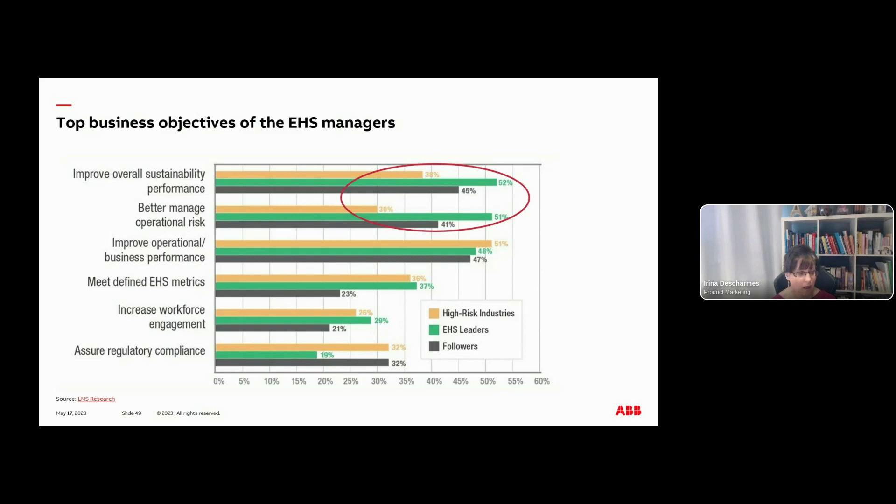Today, we continue covering these top priority areas, but this time there will be new use cases focusing more specifically on the industrial water treatment optimization.

Another area you see at the bottom is the regulatory compliance. And of course, it's no surprise that this is very important for high-risk industries who rated it higher than others. We will cover this area as well with a new case study explaining the benefits of predictive emission monitoring.

Another area is about increased workforce engagement. This is something we are really passionate about. This is what will drive actions so that you meet or exceed your defined metrics. So we will share a story about what's possible with ABB's connected workforce software.

And finally, we will talk about aligning sustainability goals with the overall business strategy and their industrial transformation initiatives. We will share examples of companies moving towards integrated digital operations.

And now, let's look into the topic of water, this critical component of any industrial operations. So over to you, Anis.

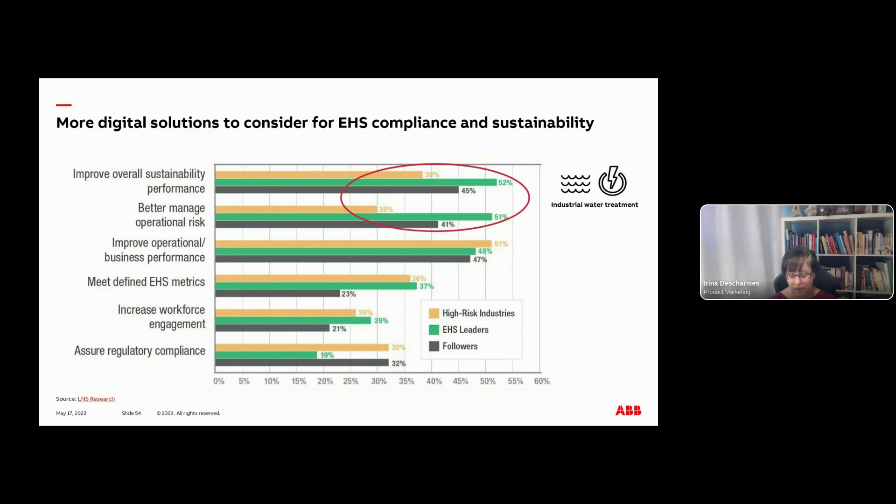Thank you, Irina. Indeed, the water topic is quite important. A few facts to share. According to the United Nations, water use has been increasing at more than double the rate of population growth. Another element to know is that industry is responsible for 12% of the global water withdrawals. And finally, some research shows that we will be unable to meet half of global water demand in the next decades unless investors, companies, and governments urgently improve water stewardship.

So today, there are several digital technologies addressing these challenges, starting from instrumentation allowing monitoring, but then going to advanced process control, analytics, and digital modeling. In addition, some companies are experimenting with the net zero water concept. Today, we would like to share with you a few examples related to industrial water optimization that are already possible with existing technologies.

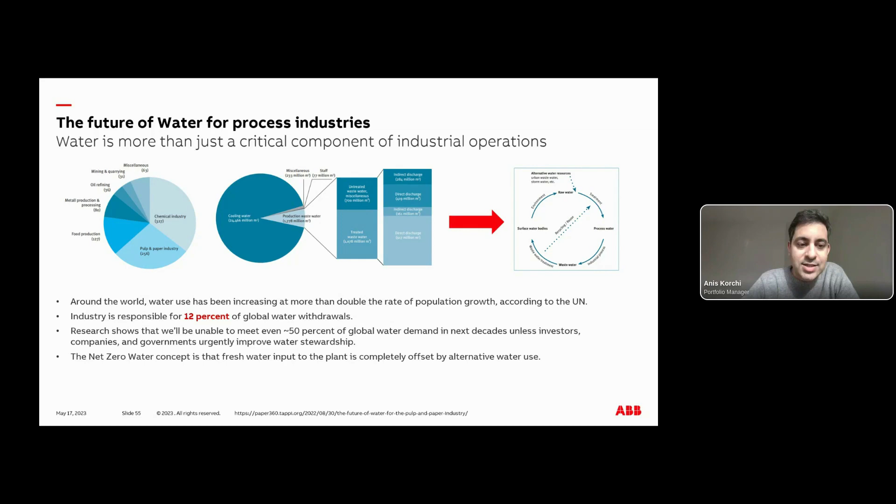Let's look at the first case. Here, we have the mining industry in front of us, where water is an integral part of the operations, but it often gets in the way. Removing it can be difficult. Any downtime in the dewatering system quickly leads to water accumulation within the mine and also possible work stoppages.

As the water volume and pressure fluctuates, the dewatering must be adjusted constantly to deliver continuous service. In many mines, the adjustment happens with manual on and off switching of the pumps without taking into account the equipment health, equipment efficiency, water levels, and electricity prices at every moment in time.

So we have a customer in South America, and ABB is proposing a solution that enables more energy efficiency, cost effectiveness, and a lower carbon footprint. The solution combines several building blocks, including data analytics to understand the pump's behavior, a layer related to advanced process control, and finally a predictive maintenance module. As said, the solution will save energy, reduce downtime, and also prolong the life of the dewatering pumps.

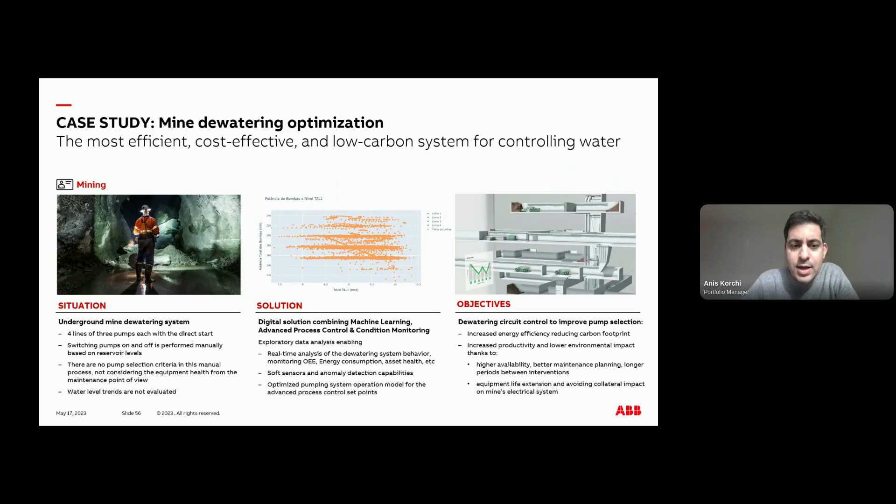Let's look at another example now, and we will move to another industry, and that's the pulp and paper industry. The water is a key resource also in here. It needs to be cleaned, used efficiently, and then returned to nature under exact specifications.

ABB has a couple of digital solutions that were successfully used in the municipal water plants. These learnings can be also applied to the industrial water treatment optimization, since they are quite similar. There are several use cases where we can use such digital optimization tools.

The first one is about the variability of influent flows and water composition. It varies depending on the paper grade that is produced, but also with the weather. For example, heavy rains may impact the water we are pulling from the natural reservoirs. So the variability of the water composition has thus an influence on the treatment process and its related energy costs and also the chemical dosing.

The software purpose is then to manage dynamically all of those disturbances. A key example of a disturbance to manage is about the aeration blowers, in order to use them more efficiently and reduce the energy costs. We would try to balance them optimally to reach the right KPIs, for example, the dissolved oxygen. Typically, the energy reduction enabled will be around 10 to 20%.

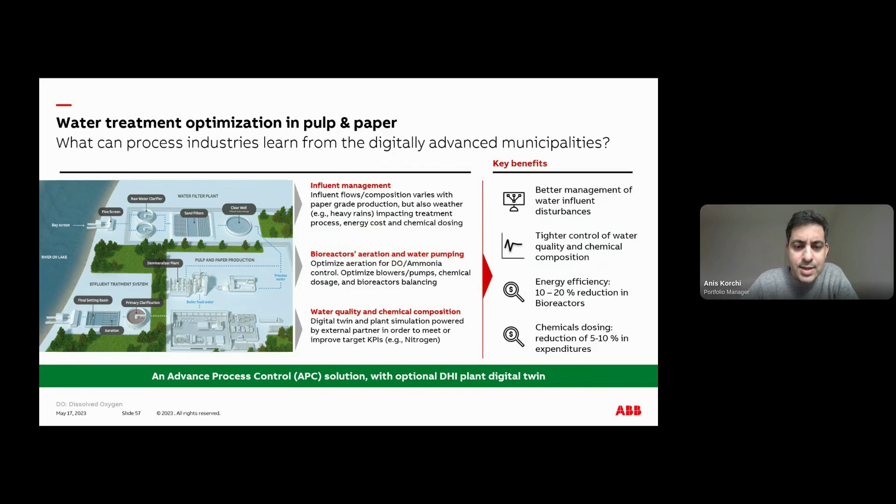So that's it on the topic of water management for today. We would like now to move to another important sustainability area, which is related to regulatory compliance and emissions. I hand it over now to my colleague, Nazanin. Thanks.

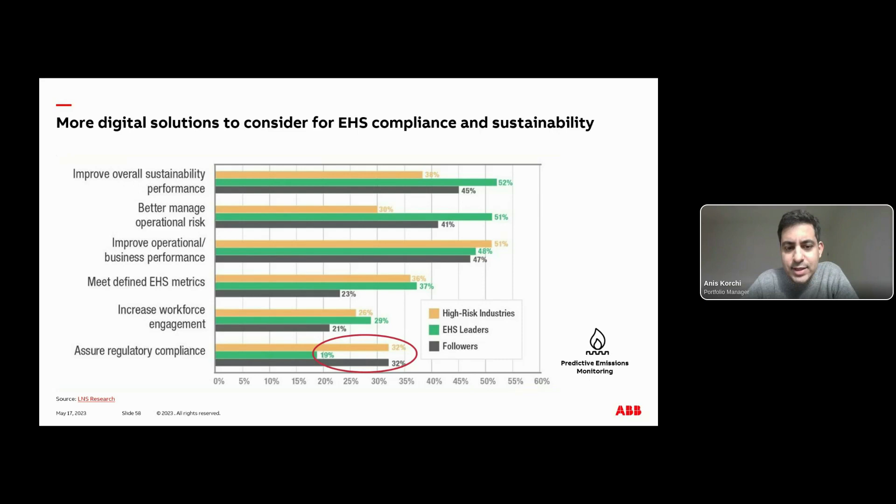Thank you, Anis. Let us have a closer look at environmental regulations, which are increasing. The demand is at least 97.5% availability of continuous emission monitoring solutions. And this increased compliance cost requires 24/7 monitoring of pollutant gases in energy-intensive industries.

Non-compliance has never been more expensive in terms of both fines and threats of shutdown, and due to this complexity of industrial operations, it is often difficult to find faults in the monitoring system.

So most of you are already familiar with continuous emission monitoring system, or so-called CEMS, which is often used for more precise measurement and regulatory compliance. But implementing, operating, and maintaining CEMS hardware is quite costly and requires proper training.

The software-based predictive emission monitoring system, so-called PEMS, was developed as an alternative to overcome these drawbacks. It relies on using operating parameters of the combustion facilities with machine learning methods to build a model that can predict emissions. The capital costs for PEMS are about 50% lower, and its operation and maintenance represent only 10 to 20% of CEMS cost.

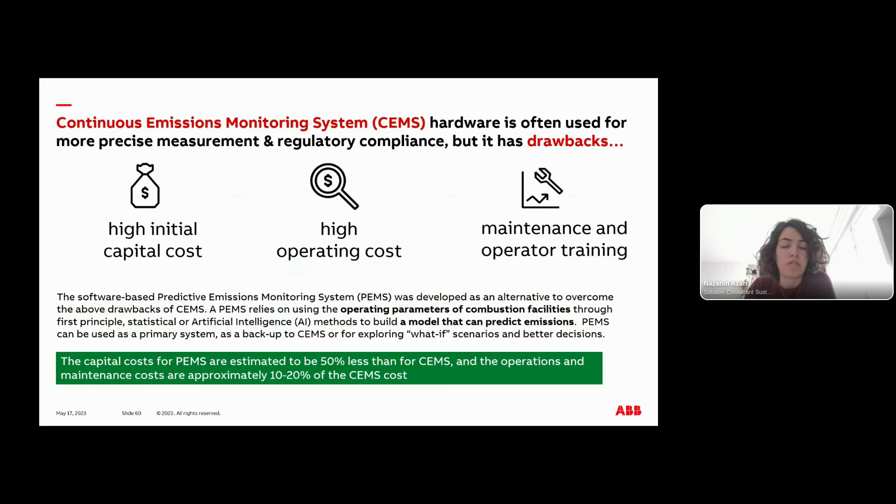Hence it can be used as a primary system, or as a backup for CEMS, for exploring what-if scenarios and better decision making.

ABB is currently working with a natural gas provider in the Middle East to provide maximum reliability and consistency to the compliant emission monitoring reporting. As you see here, process industry can learn from this predictive emission monitoring example.

This non-invasive digital technology exploits the correlation between process variables and emissions. The cost of the compliant emission reporting infrastructure is significantly reduced for this customer, and data availability is close to 100% as required by the certification.

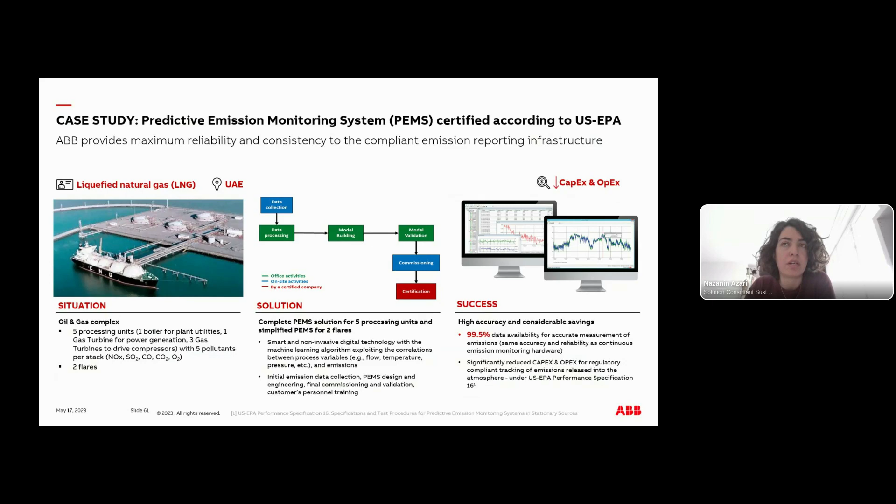This is an affordable, accurate, and compliant digital solution for emission monitoring. It can be applied also in pulp and paper, metal, cement, and other industrial plants with gas turbines, boilers, furnaces, internal combustion engines, or other complex process units. The key requirement here is constant quality combustion fuel as well as proper instrumentation and automation.

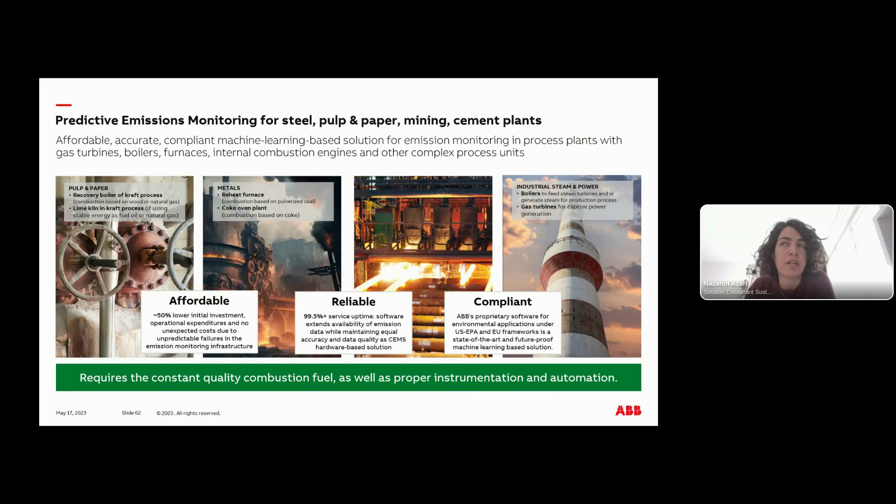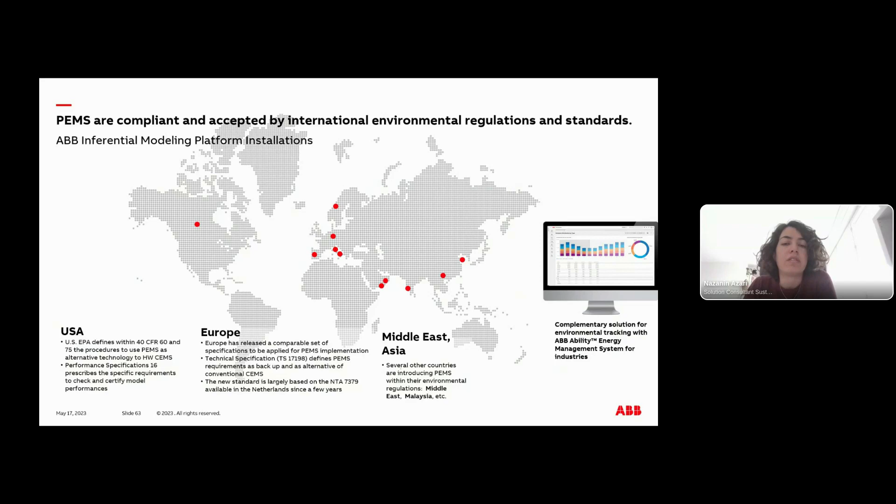According to a study by the Manufacturing Institute, 78% of companies indicated that they were concerned about the aging workforce, specifically the loss of knowledge that accompanies retirements. The high volume of workplace departures has led to a huge gap in expertise and skills at many companies. This hinders their ability to ensure safe execution of their processes or to fully embrace sustainability initiatives. So what can be done for higher workforce engagement in environmental health and safety initiatives?

In this example, ABB helped a Japanese utility address labor issues, safety, and regulatory compliance risks by empowering frontline workers with modern tools. Instead of waiting for experts to arrive on site for troubleshooting, they can call experts within or outside their organization and solve issues over audio, video, and more immersive holographic experience.

They have also converted their paper-based runbooks into interactive apps, letting site engineers get step-by-step guidance from their tablets. The app automatically acquires process values from the DCS to determine whether a procedure has been performed as planned. Teams are empowered to digitize and continuously improve any procedure, health and safety observation, environmental compliance, energy audits, and so on.

With timestamps, execution history tracking, and reporting, this kind of toolset was missing before. It covers many routine and complex activities not covered by other systems like DCS, MES, or CMMS. And of course, less traveling has a direct impact on emission reduction and contributes to achieving companies' sustainability commitments, such as Scope 3.

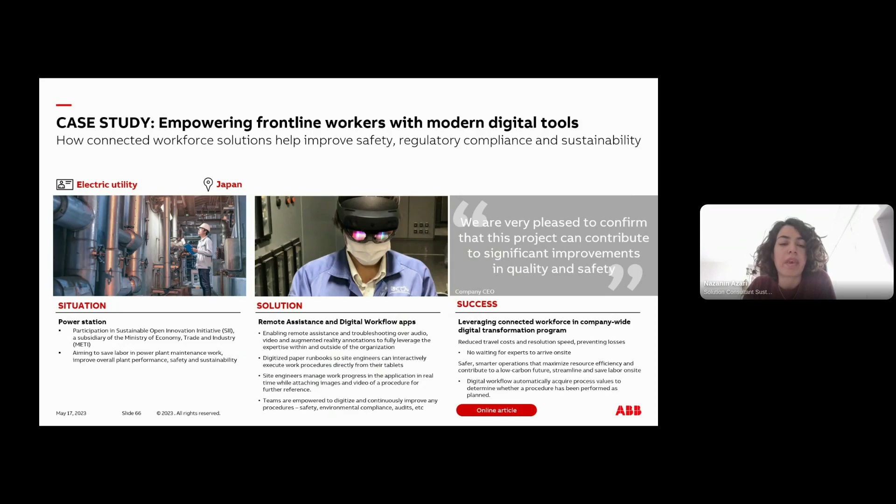Our next studies will demonstrate how digital champions go beyond operational and business performance objectives. They are embedding sustainability into every aspect and moving toward integrated digital operations. Irina can tell you about such even more ambitious programs. Thank you.

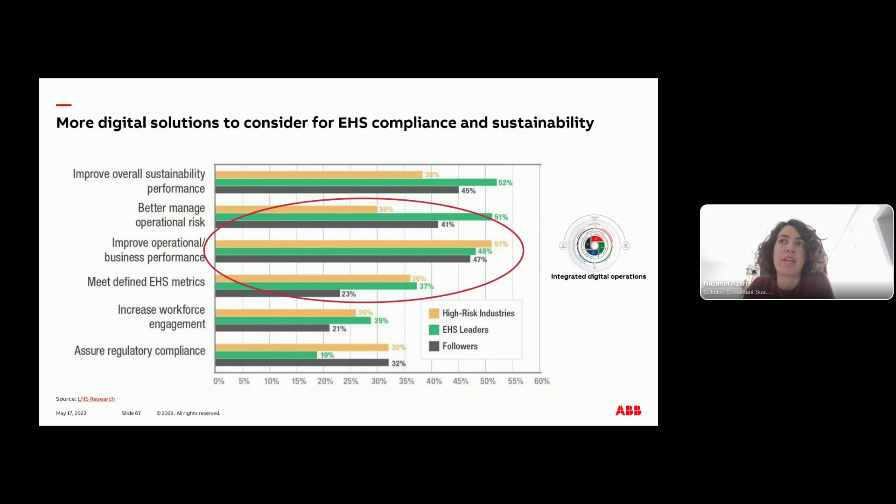Sustainability programs start with digitizing energy management. But as we have seen in some of the previous case studies, when the data collection required for energy monitoring is already in place, this facilitates the connection to other digital systems, for example, manufacturing execution systems for better coordination. And the value of an overall operation strategy will be further extended.

When EMS and MES are also interacting with systems such as asset performance management (APM), advanced process control (APC), or connected workforce, as Nazanin explained to us earlier, these connections provide more automated ways to achieve those more ambitious targets set by digital champions. This also opens opportunities to leverage more analytics with other ecosystem partners, and this is a trend we see, which we will again illustrate with some real life examples from customers we are working with.

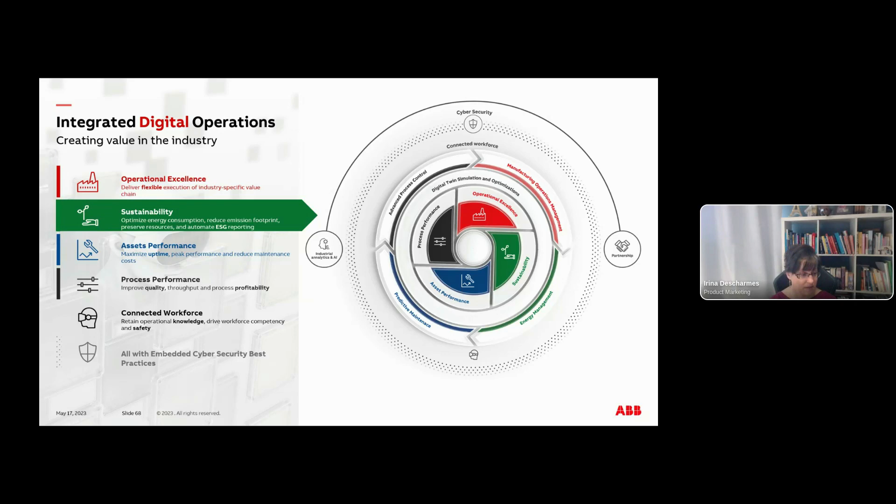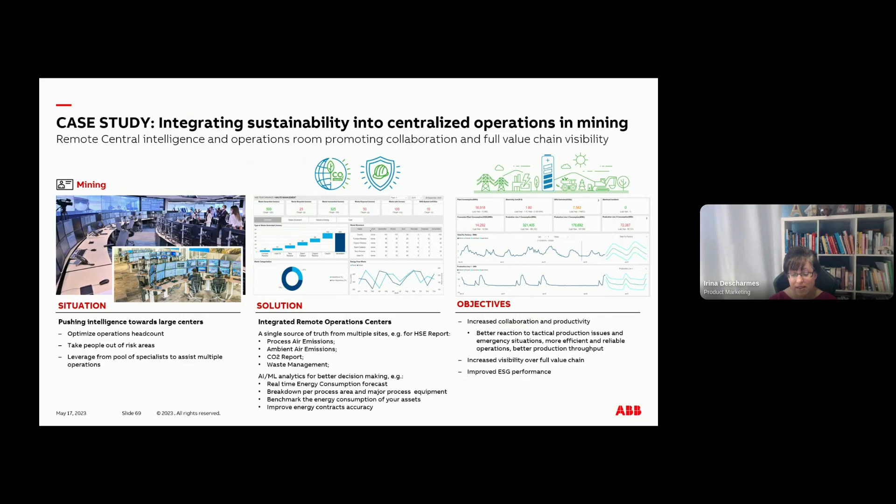In this case, energy optimization is not only about costs, it's about intelligent orchestration across all parts of the operation. In the example of mining, there is a lot of potential here if you treat the mine, the haulage, the processing plant, and other areas holistically. Let's see how different digital solutions will work together in this case for this particular customer.

We're currently integrating the mine and the processing facility, unifying the data from multiple systems, which will enable more strategic decision support. Then, of course, the automation and energy management system will take care of all this coordination and orchestration that we were talking about before. Using the data from other digital systems will then offer additional benefits related to sustainability.

For example, with APM, they will support identifying bad actors for energy reduction potential, prolong asset life, and reduce waste. With APC, they will operate closer to constraint limits at the economic optimum. In this way, this will result in less energy, fewer consumables, and less emissions.

With MES, an operations management system for mining, they will be able to automatically coordinate the production schedule with the most optimal energy mix. And with mobile and remote solutions for connected workforce, which also includes operator training simulators, they will drive people's competency. That competency can be in any area, and in this case, as part of a sustainability program, could be around energy efficiency, safety, etc.

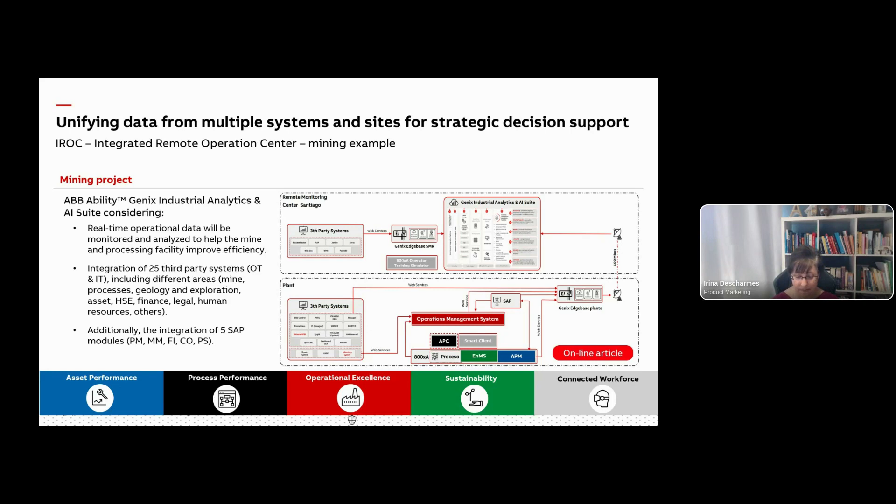So very similar examples are happening in other industries as well. Let me give you another one from the cement industry.

The enterprise clients of ABB used to evolve in a very diverse system landscape, which caused very high cost of ownership and low visibility. So leveraging ABB's vast experience in the cement domain and advanced process know-how, we delivered the first of a kind integrated IT/OT solution with very positive impact, not only on the sustainability performance, but overall productivity, quality, and reliability across the multiple plants. The return on investment was between 5 to 12 months, depending on the use case.

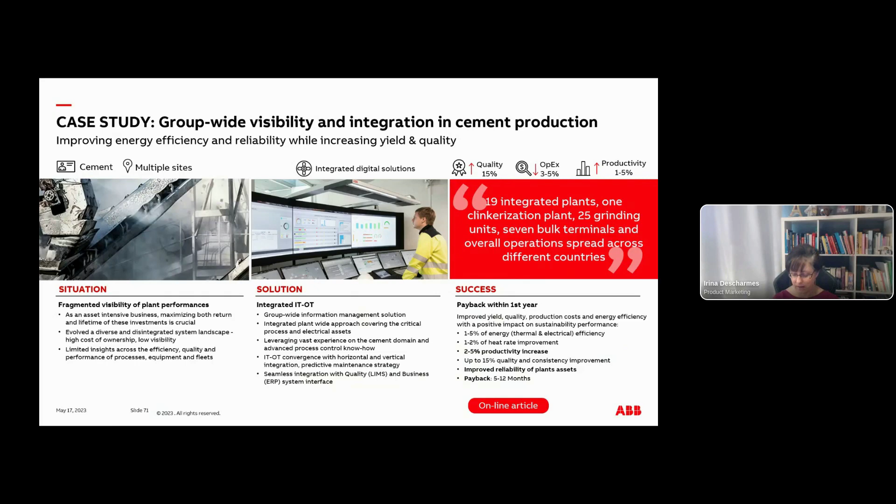So we can see on the next slide the examples of the solutions that were applied here. You can see how these solutions work together. System integration and automated functions are coordinating thermal and electrical energy with the production scheduling and MES. Further savings are achieved through the process, steam and power optimization. We also implemented predictive asset management strategies and laboratory automation solutions.

All together, these solutions working in combination had a dramatic impact on the financial improvements. The overall operating costs were reduced by 3 to 5%, which maximized the total profit of the operation. And this goes beyond economic optimization. This type of enterprise-wide view across multiple plants helps a lot with the tracking of the progress of the sustainability program, and contributes to a better reputation and a low carbon cement production.

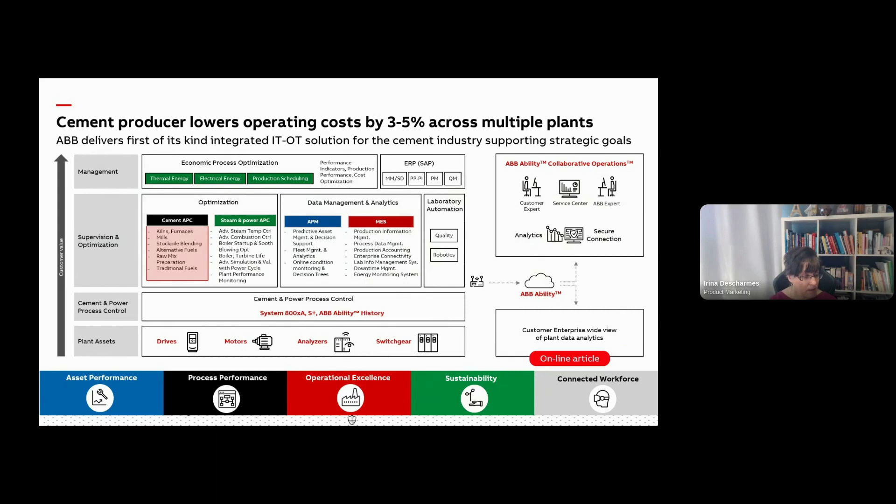Similar to this example, we also work with the pulp and paper industry. In this case, it's a tissue manufacturer for whom we applied a very phased approach towards creating a centralized fleet monitoring and operations. And it really aligns very well with other industries. There was even a survey done specifically among the tissue manufacturing decision makers who underlined that profitability and sustainability are key priority areas.

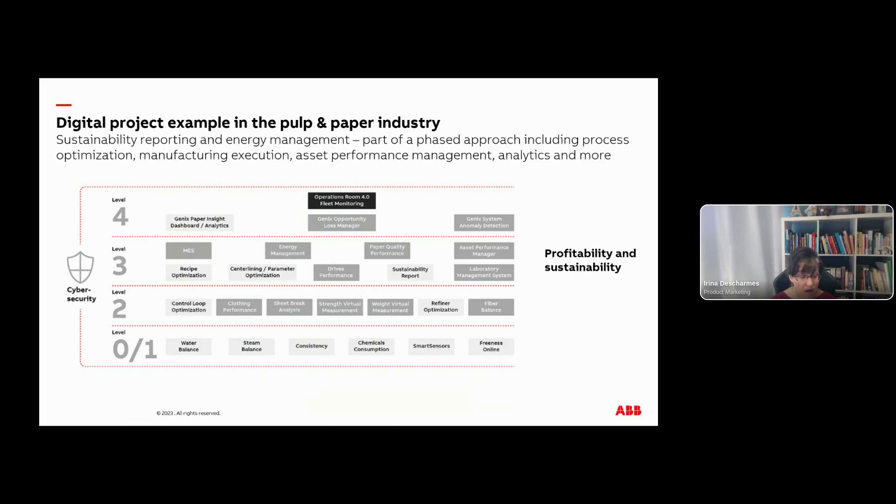So how do they implement it in practice? Sustainability reporting, energy management, together with the anomaly detection solution based on artificial intelligence tools, will be part of that overall digital strategy for this customer. They're marked in green on this graph. They will also implement a manufacturing execution system.

Everything you see in black, these are various pulp and paper specific process optimization solutions. There will also be a solution about asset performance management, analytics, and more. So all these will contribute to this central operation 4.0, driving the profitability and sustainability agenda.

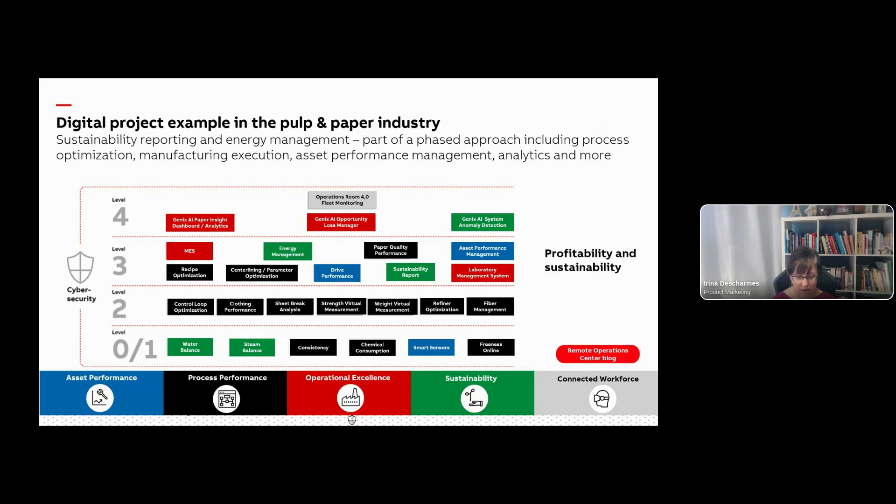So you can see that finding various pathways to sustainability starts with the data. We can help you contextualize all available data and turn it into useful insights for each function, not only for the corporate sustainability manager, but also reliability, maintenance, operations, energy manager, and of course, executive functions.

We hope that our webinar series has provided you strong evidence of the significant contribution of such data-driven approaches. When more people collaborate and when they do even minor adjustments on hourly, daily, monthly basis, or they do the strategic planning based on the data approach, you can achieve much more. You can establish all the decision support your people need to meet and exceed your overall goals year after year.